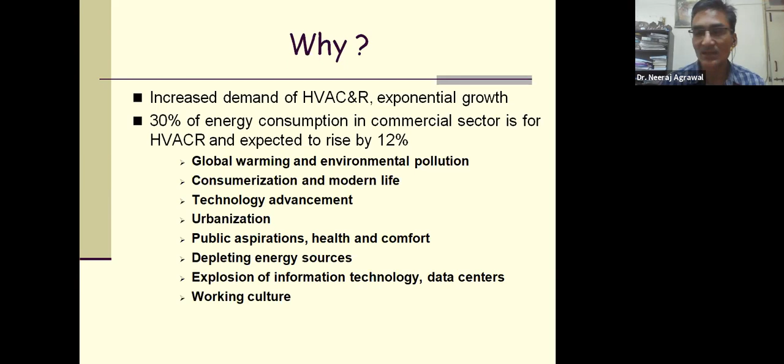The explosion of information technology and data centers, as I said, because air conditioned data centers are altogether an area which is coming up. And of course, the working culture as well.

Conventional cooling technology, the vapor compression system, is considered to be the workhorse. Still, the maximum cooling share is by the vapor compression system, not only in India but globally. So what is the problem with vapor compression refrigeration and air conditioning systems?

It is completely an electrical driven process, though some technology advancements are taking place. But by and large, it is a system that is completely electrical driven. As I mentioned, the maximum share is still huge.

As of 2005 in the US, 99.9% of systems were running on this vapor compression system. The first cost is low, and it is good because it is convenient and safe to use.

But of course it's energy intensive. One reason, as you know, from the 1980s it was discovered that the use of CFCs in vapor compression systems, where refrigerants like CFC, HCFC, and HFCs are commonly used, causes destruction of the ozone layer and global climate change.

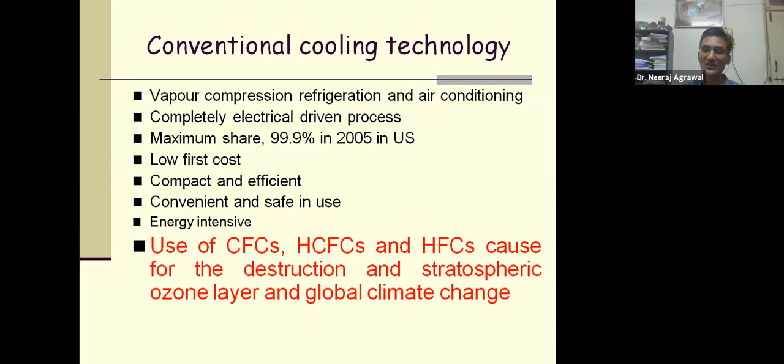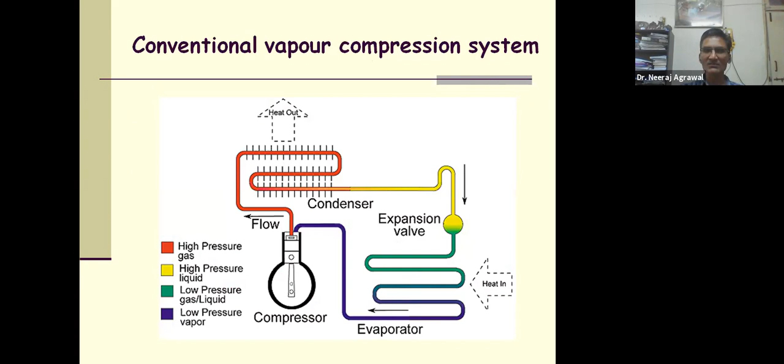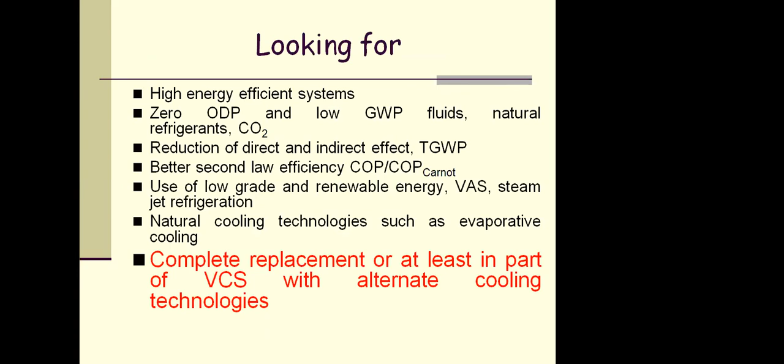So now, since the vapor compression system is used in maximum cases, but because they are an energy intensive process consuming a lot of direct electrical energy, and there's also the problem with the refrigerant, we are looking for a high energy efficient system.

One target, of course, can be achieved with the vapor compression system also, I'm not denying that. But we have to look for high energy efficient systems with zero ODP and low GWP fluids, and systems that can run on natural refrigerants, because CFCs, HFCs, or HCFCs are all harmful for the ozone layer.

Reduction of direct and indirect effect - this is what we call total global warming potential. That means one has to reduce or limit refrigerant use if it gets directly leaked, which is why we need to find a natural refrigerant.

Indirectly this means one has to reduce the energy consumption, because if energy consumption is less, then automatically the greenhouse gas emission will be less. We also need better second law efficiency, because one cannot rely only on the first law efficiency.

If you compare the vapor absorption system with the vapor compression system, we say the COP for vapor compression may be 3 or 4, but that COP is only the first law COP. In the vapor absorption system, though its COP is less than 1, it is a true COP, whereas the first law COP is not a true COP. So we have to look to the second law efficiency.

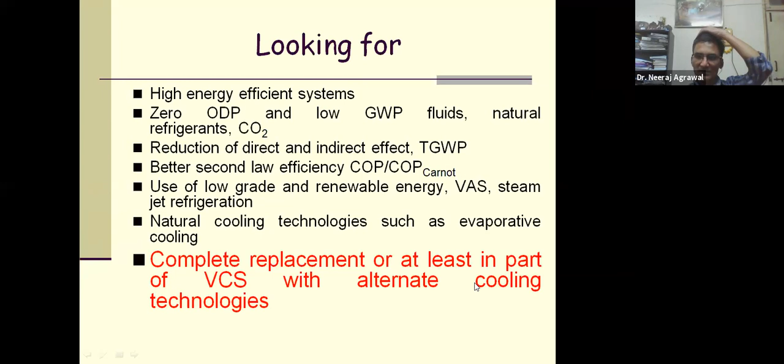Use of low grade and renewable energy, like vapor absorption systems, steam jet refrigeration, and natural cooling technology such as evaporative cooling, can enable complete replacement of the vapor compression system with alternate cooling technology.

Now if you look at these, these are some of the technologies enlisted here. Electrical: thermionic cooling, electrocaloric cooling. Mechanical vapor compression system: subcritical and transcritical. Where there is no phase change: air cooling, pulse tube, ejector, vortex tube, reverse Stirling - different technologies are there. Acoustic: thermoacoustic refrigeration, magnetic refrigeration. Chemical: latent heat, potential, thermal, and natural cooling is also there. So these are the different cooling technologies.

If you look here, the maximum share is still with vapor compression, and within vapor compression the maximum focus was on subcritical. The rest of the technologies are not in very much use. Electrical thermoelectric cooling is there, but it's still not used at the commercial level. Magnetic cooling is still not at all in use at the commercial level. So we have to look at some alternate technologies.

So here I will try to touch upon some of the alternate technologies, like evaporative cooling, vortex tubes, use of natural refrigerants, and indirect-direct evaporative cooling. That is what we will see in the subsequent slides.

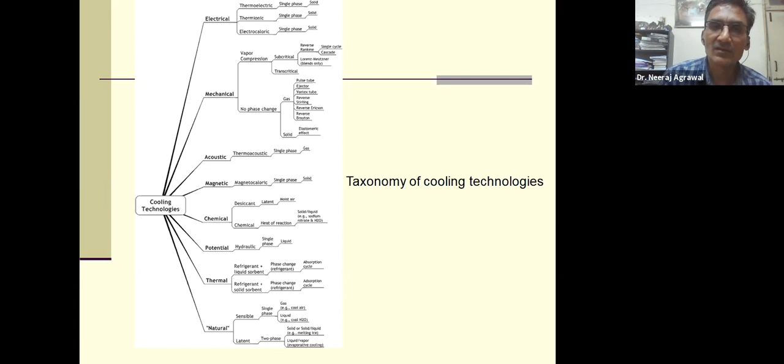So the alternate cooling technologies which I'm going to cover: evaporative cooling, which is basically an age-old technology, used in all ancient buildings, used to cool the building. Two-stage indirect-direct evaporative cooling, which is an improved version of evaporative cooling. Then hybrid desiccant cooling, where two different technologies are hybridized. And then natural refrigerant with transcritical CO2 cooling technology.

As I said, refrigerants are the culprit, so we have to look for sustainable technology. One way is to use natural refrigerants, and of course vortex tubes are also a wonderful system. These are some of the alternate cooling technologies where, in a sense, there is no refrigerant or chemical used which can harm the environment, and at the same time the energy consumption is also relatively less. So both the problems I just narrated can be solved.

But of course, when we talk about evaporative cooling, performance-wise or output-wise, it is not as effective as a vapor compression system, but they are very close. So with some sacrifice, one can go with the technique of evaporative cooling.

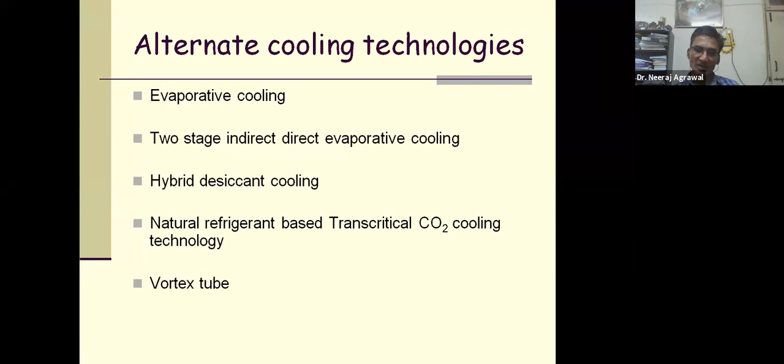Evaporative cooling, as I mentioned, is an ancient technique, effectively used in almost all ancient buildings across the globe, not only in India but across the globe. That's why all our ancient buildings are surrounded by water bodies. Why? Because when water flows around the buildings, evaporation takes place, so cold air flows across the building, and one can have a cooling effect.

So this evaporative cooling is very common, one of the very common technologies in northern India. In Ahmedabad, I still remember, is a place where evaporative coolers are being manufactured at industrial level, and used at the industrial level. In many places now, even the ducting is also there.

Once I visited Bajaj Auto in Pune, and they are using evaporative cooling very intensively for providing cooling to the workers.

Due to this, their productivity has increased. So one can understand how it is effective—simple, inexpensive, and an attractive solution for conventional cooling systems. This is being used in many places, and evaporative cooling can also be used as a subsystem for a vapor compression system.

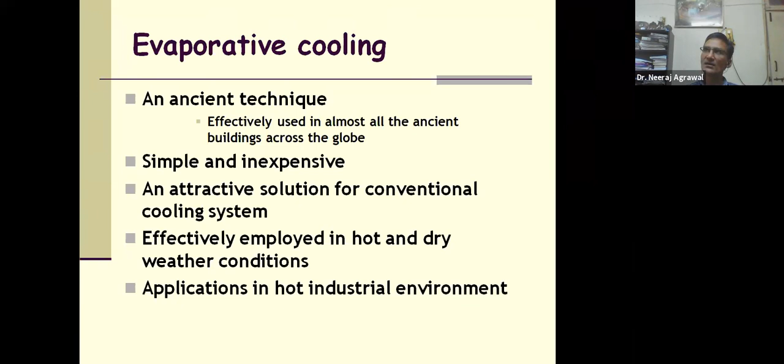So theory of evaporative cooling—on what basis does it work? Of course, the whole principle of evaporative cooling is based on adiabatic saturation. Adiabatic saturation means the air flows over the water, and air gets saturated, so the water gets evaporated and moisture is being transferred.

So in that whole process, this is the transfer—basically air surrenders its sensible heat to the water for evaporation, and then this heat is transferred into the air in the form of latent heat. So when air surrenders its sensible heat, it means its temperature drops, but at the same time it takes back heat in the form of latent heat.

That means the moisture content increases. So this way, the temperature of the air decreases, but at the same time at the cost of its humidity. That is the reason. So this whole process takes place adiabatically, that's why we can say it is adiabatic saturation.

That process can continue till the air gets saturated, that's why we say adiabatic saturation. So here, one of the technical terms is WBT, or wet bulb temperature, of the ambient or surrounding air, which plays a very important role, because in evaporative cooling, the air cannot be cooled lower than the wet bulb temperature.

The kind of process which takes place, we call cooling and humidification. As I mentioned, there is a combined heat and mass transfer—simultaneously, air surrenders sensible heat and evaporation takes place. So that's why doing experimentation on evaporative cooling is relatively easy, but doing theoretical work is really challenging, because both heat and mass transfer are involved.

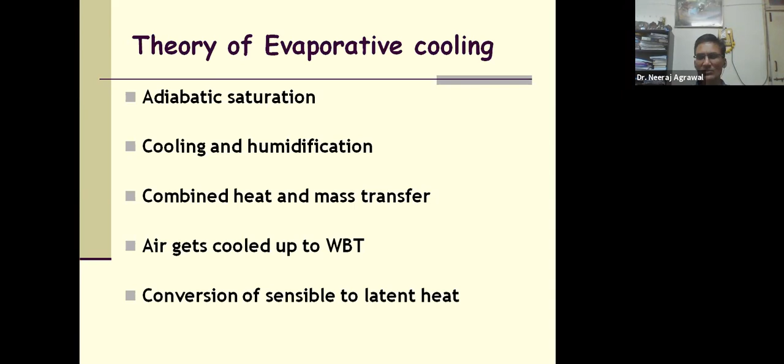Air gets cooled up to WBT, that's why, as I said, this is a limitation—conversion of sensible to latent heat, as I explained.

So this is a very typical simple diagram of evaporative cooling. As hot air goes through, this is the pad where water falls. So if you look here, the performance of evaporative cooling very much depends on the pad quality, density of the pad, and basically its retention capacity of the water—how the structure is—that plays a very important role in evaporative cooling.

So look here, this is the wet bulb temperature. Across the wet bulb temperature, you see the temperature has dropped from this point to this substantial temperature drop. The maximum it can be dropped to is here, as you know, this is the wet bulb temperature of the air. So this is the psychrometric representation.

Then practically, it can be cooled to this point, then it is supplied inside the room. So one can see here, as the air gets cooled, its temperature drops, but humidity increases, and then the air is supplied inside the room. When it is supplied inside the room, it picks up heat, so its temperature increases, and also there is some addition of moisture by the occupants, so humidity also slightly increases.

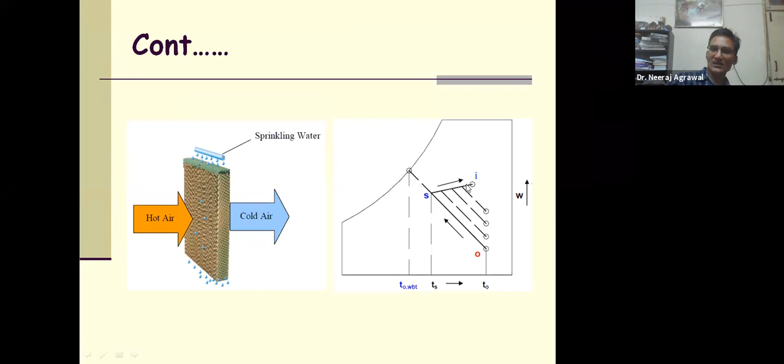So I have done some experiments on that. In the subsequent slide, I will show you something. In one of my projects on evaporative cooling, I took two different kinds of pad material, Aspen and cellulose.

We have taken some modification in the design. Look over here, the energy consumption is just 18 watts. It is one pump and a fan, not more than half a kilowatt or even less than that. So look over here the kind of energy input.

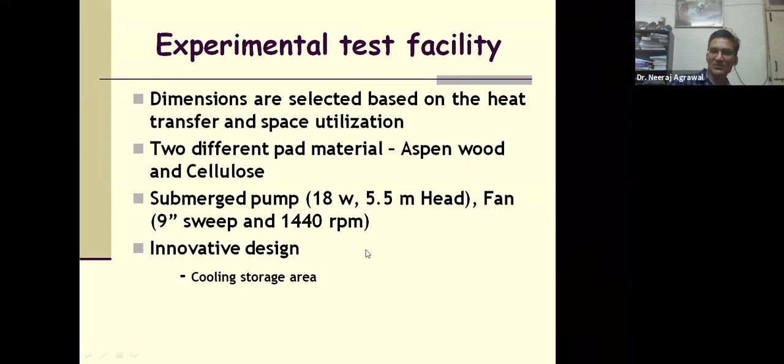So look over here, there are two different kinds, cellulose and Aspen wood. These are the two kinds of pads. And this is the one design which I have used over here. Look over here, these are all three sides, there are pads over here. This is the conventional motor.

But here at the top, one box is created, and that water, which is at quite low temperature up to the temperature of WBT, is pumped. This water is designed in such a way that the rate at which it goes down and falls over the pad, and the rate at which it is pumped - the rate at which it goes down is less.

So always a water level is maintained here, and that water at the temperature of the WBT of incoming air, or slightly higher than the WBT, can be used to keep the commodity cool, like vegetables or other things in the summer. So that is the basic concept of this design.

So this is basically a simple water pump, and this is the conditioned space. This is how the supply air passes through the media pad. This is the experimental test facility.

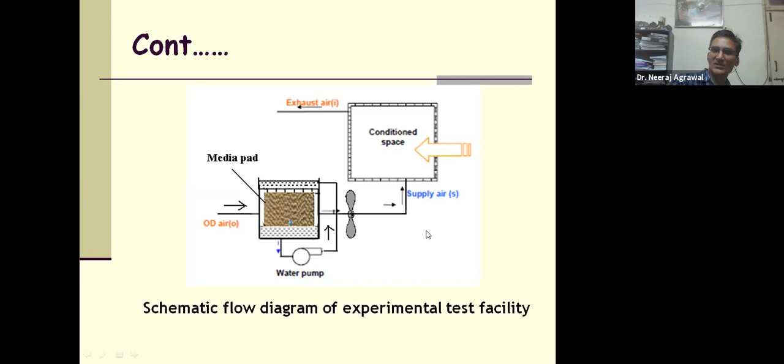The tests were conducted with the two media pads I mentioned, Aspen wood and cellulose, varying the flow rate to optimize the incline of the slot. What is that incline of slot?

Let me explain. Look over here, the slots are there, and here is the fan. Air is being sucked from here, from the bottom side. Look over here, at the initial beginning itself there is maximum contact of air and water. So the maximum heat transfer, or maximum evaporation, takes place at the point where the air is sucked.

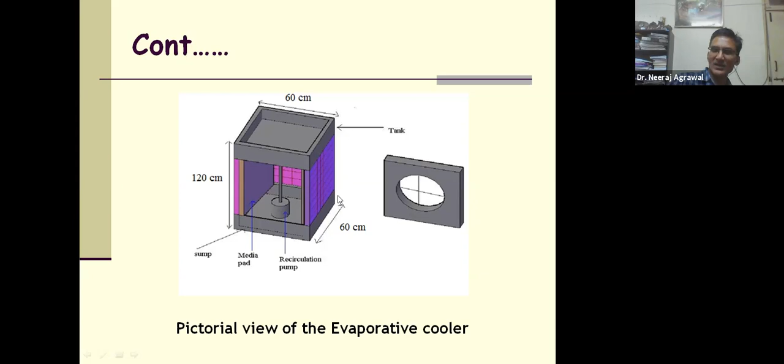Now what happened, the thought was: if I make a slot which is inclined, when the water falls on that, the maximum water gets accumulated at that point. So that means when there is more water there, the performance may increase. So that is the concept used - the incline of the slot.

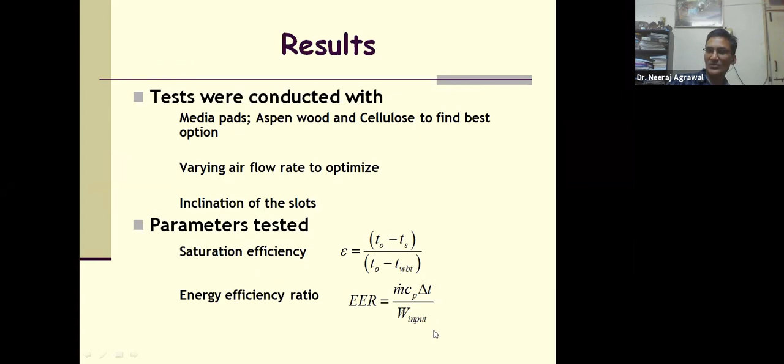There are two parameters: saturation efficiency, which is T0 minus Ts, actual divided by T0 minus Twbt - this is the practical temperature drop over the maximum possible - and energy efficiency ratio, based on the mass flow rate of air, temperature drop, and the work input in the form of the pump and such.

If the air flow rate is lower than a certain optimum flow rate, why is the saturation efficiency low? Because the air flow rate is so low that by the time the air picks up the heat, the water is not sufficient enough, so there is no proper evaporation taking place.

But at the same time, we have to match it such that the rate at which the water falls and the rate at which air reaches complement each other. Now, if the air flow rate is very high, the air doesn't get time to come in proper contact with the water, so proper evaporation cannot take place.

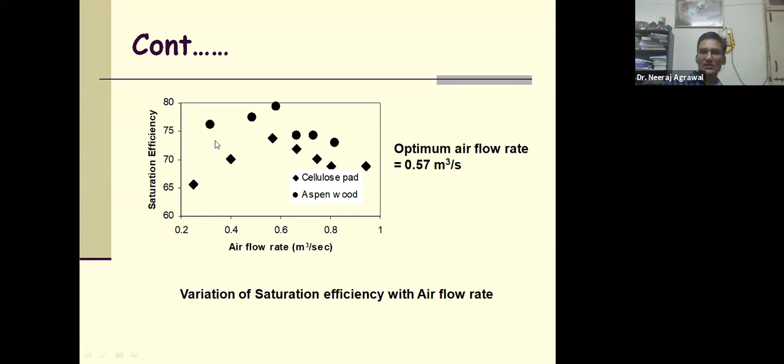In the previous graph, aspen wood gives better saturation efficiency, but the pressure drop is more, which means it consumes more power. So one has to look at totality - due to high saturation efficiency, aspen wood may be good in terms of performance with respect to drop in temperature in a given time, but it consumes more power, and there is a substantial difference. So from this point of view, the cellulose pad is better.

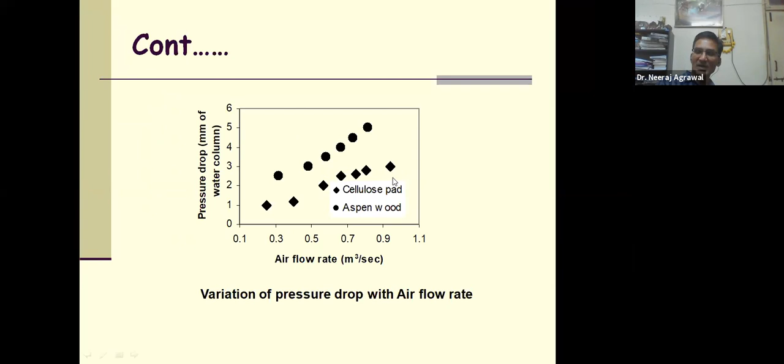One has to look at other aspects also, like saturation efficiency and wet bulb depression. Wet bulb depression plays a very important role - as it increases, since there is a difference between dry bulb temperature and wet bulb temperature, as dry bulb temperature increases, things become drier, so the performance will be better. But in this case also, aspen wood performs better.

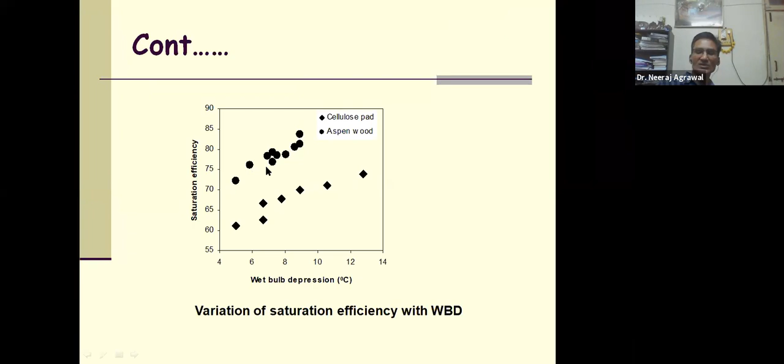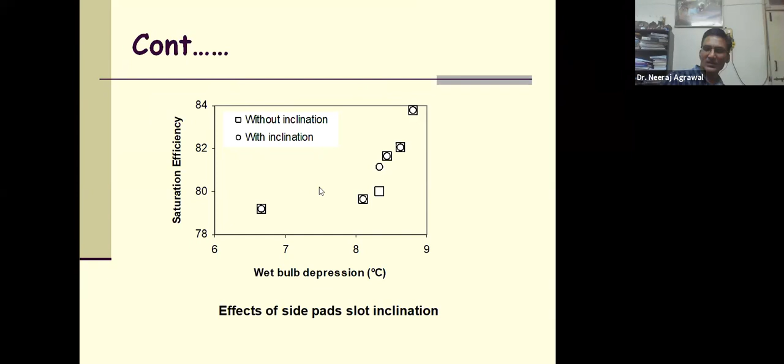I also tried some kind of inclination in the slot, so that more water can accumulate towards the end of the evaporative cooler, from where the air gets entered. But perhaps we could not record that properly, so there is not much data on the wet bulb depression here.

Now look overall at cellulose pad and aspen wood. With the cellulose pad, the optimum flow rate is almost the same - there is some difference, in aspen wood it is 0.58 and cellulose pad is 0.57. But the pressure drop, if you look here, cellulose pad pressure drop is 2 mm and in aspen wood it is 3.4, so with aspen wood the pressure drop is basically more.

Power consumption - look at the difference here, it is pretty high, 90.32. Saturation efficiency, of course aspen wood is higher, 79. Durability - once you buy the cellulose pad it can run for 2 to 6 years, but aspen wood lasts only 5 months. And energy efficiency ratio is something like 47.75 for one and 44.88 for the other. So though the saturation efficiency of aspen wood is higher, in totality the cellulose pad is better.

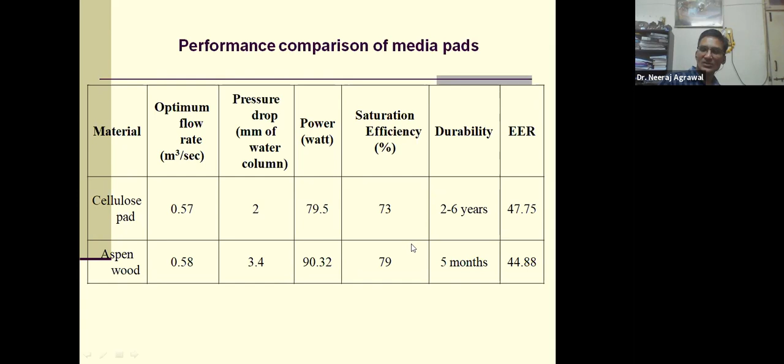That's why down the line till 2005 or 2010, people were using aspen wood, but nowadays the entire evaporative cooling industry uses the cellulose pad only. It is very good - there is no sagging problem. So this is basically the conclusion.

Now, of course, when we go with the kind of evaporative cooling we discussed, this is a direct evaporative cooler. So there is some limitation of direct evaporative cooling - it is ineffective in humid and temperate conditions, that means not much effective when dry bulb temperature is less than 40 degrees and wet bulb temperature is greater than 23 degrees.

Of course, in evaporative cooling, it is a well known fact that because high speed is required, there is noise and vibrations. Since there is no control of humidity, and due to the flow of air, a lot of draft is formed within the room. That means there is not uniform cooling. One part where the air reaches is pretty cool, and other parts there is no cooling.

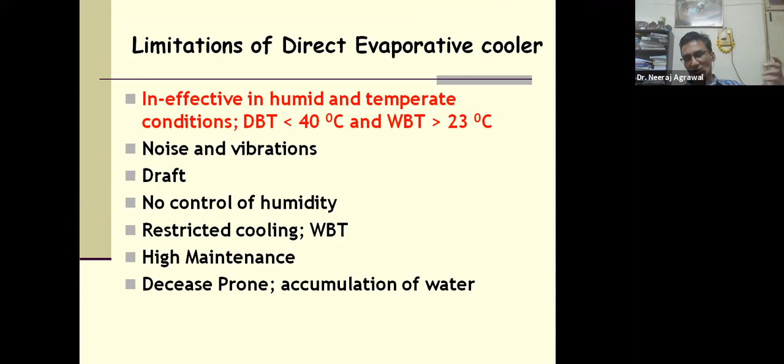So people always try to sit in front of the evaporative cooler, and some kind of fight happens over it, but in case of air conditioning, the entire room gets air conditioned. There is no control of humidity, restricted cooling only up to WBT, high maintenance, and disease prone, because water continuously remains, causing accumulation of water.

But of course, the humidity increases. So now what is the solution? If we can have some solution where with indirect evaporative cooling, one can have a temperature drop, but the rise in humidity is not as high as in direct evaporative cooling.

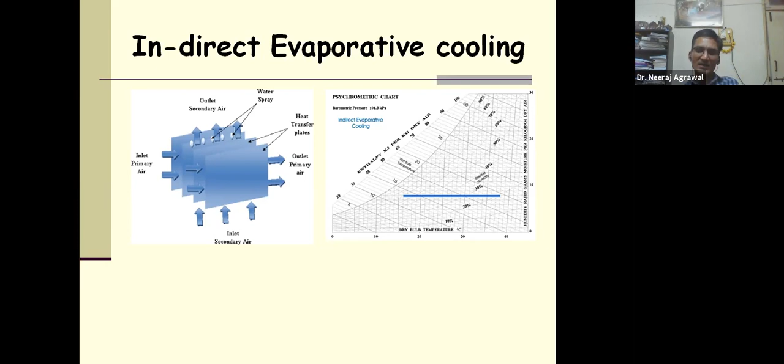So look over here, this is a two-stage evaporative cooling. One is the indirect, where the warm air gets cooled not in direct contact with the water, rather through surfaces cooled using the direct evaporative cooling technique with secondary air flow. So at one side, direct evaporative cooling takes place, cooling the surfaces, and these surfaces form a channel through which the warm air flows, getting cooled, and then it goes to direct evaporative cooling.

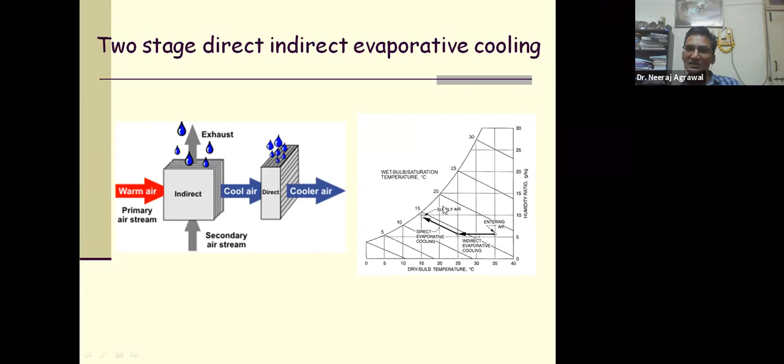So one can see there is no change in humidity, but there is a drop in temperature, and then there is the direct stage. Always remember, it cannot be direct and indirect, it is always indirect and then direct. If I go directly from here to achieve the same temperature drop, the humidity would be pretty high compared to this method.

So here, sensible cooling is followed by adiabatic saturation, effective in all weather conditions, because even in high humidity conditions one can achieve better humidity control, better cooling, energy efficiency, and less latent load. This is the reason.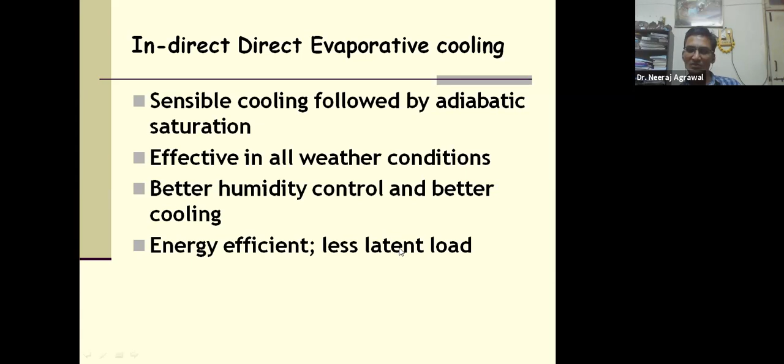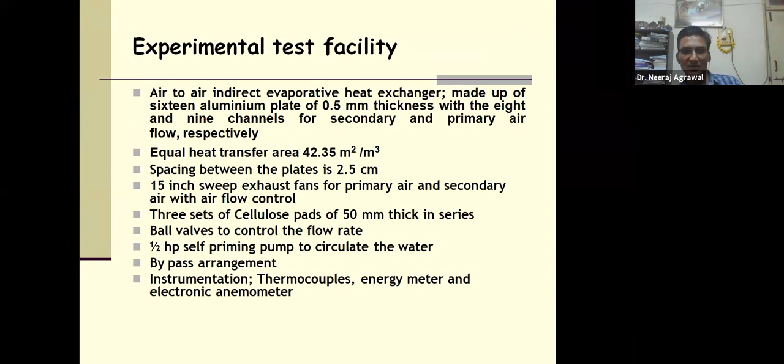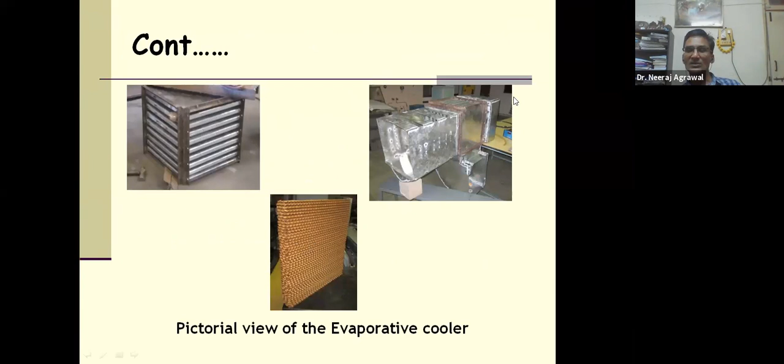Now if you look over here, this is the experimental setup, where again I have done some experimentation. Basically you can see the different specifications. As I was mentioning, with the channel, air flows through it. So this is the fabrication we have done. This is a pad, and a duct was formed, primary and secondary. This is the overall picture.

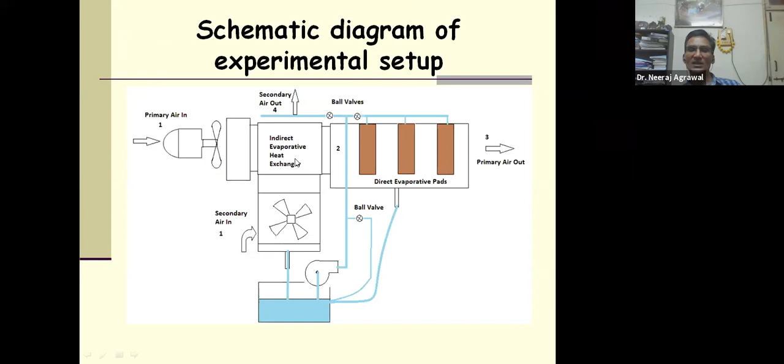So look over here, this is the indirect evaporative cooling. Secondary air goes here, gets cooled, and flows in the channel. Primary air flows over here, through the channel, and then the direct stage happens. So in this way the air gets cooled. This is the system, first indirect, then direct, and then it goes further.

So the operating parameters are water flow rate, primary flow rate, secondary flow rate, heat transfer, pad material, and ambient conditions, which will vary. Look over here, this is the water flow rate for two different fluids: 12 liters per minute and 8 liters per minute, showing secondary air outlet temperature. Looking at the secondary air velocity, for both cases there is one point at which the secondary outlet temperature is minimum.

So this is again, one has to maintain this particular air velocity so that the channel gets cooled more and more. So this is the conclusion.

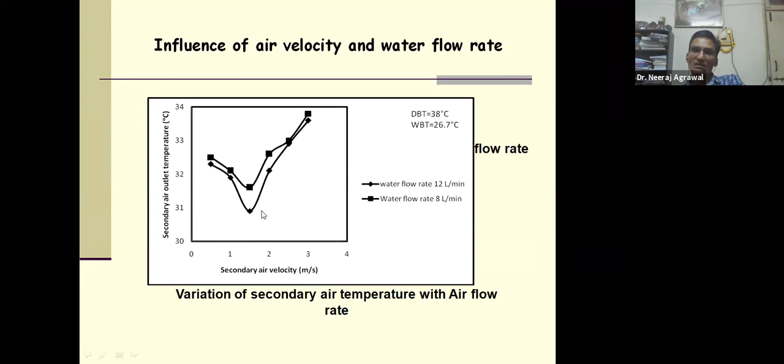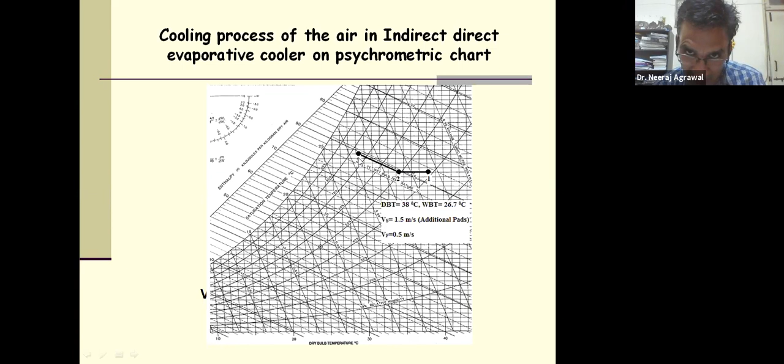Now look over here, this is the psychrometric representation. So how we got the temperature drop: the air supply temperature was somewhere 38 degrees Celsius. Then in indirect evaporative cooling it was cooled to somewhere 33, and then in direct evaporative cooling it was cooled to 30, from 29 degrees Celsius.

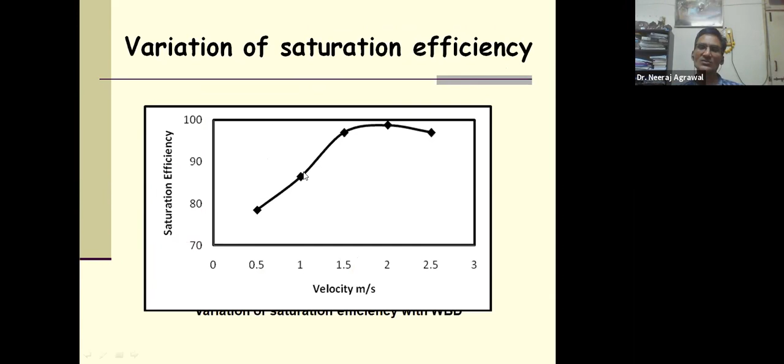So this is the variation of saturation efficiency. Velocity increases saturation efficiency, but beyond that it was arrested.

Then there is another concept which we call hybrid desiccant cooling. Hybrid desiccant cooling means a combination of vapor compression system and desiccant. This system is used in high humidity conditions, high latent load, where the sensible heat factor is pretty low due to high latent load. For high latent load, one has to reduce the ADP of the coil, and once the ADP is reduced, there is unnecessarily a penalty on the vapor compression system. So the solution is to go with hybrid desiccant cooling.

Conventional process cooling and dehumidification needs low ADP, which causes energy inefficiency, because it's a hybrid of two systems: desiccant wheel followed by vapor compression system. Latent load removal is done by the desiccant wheel, so there is no need to drop the temperature of the cooling coil. Removal of sensible load is done by the vapor compression system DX coil.

The wheel needs to be regenerated after each cycle, because the wheel absorbs moisture and needs to be made ready for the next cycle. It has to be heated, so sensible energy is consumed. Air gets heated after removal of latent load and needs to be cooled before passing the DX coil. Cooling can be done by employing indirect evaporative cooling, nocturnal cooling, or mixing of recirculated air.

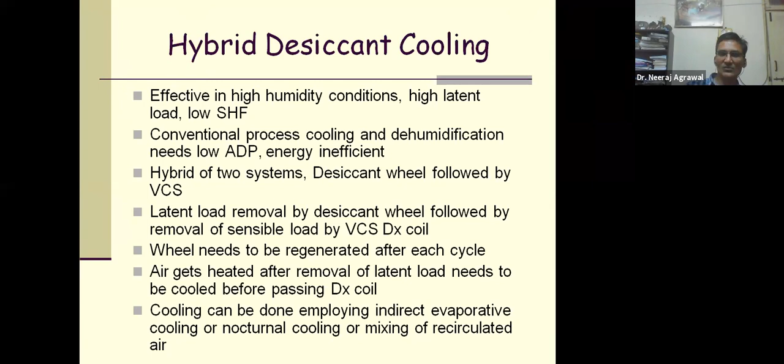So this is the phenomena which I have used over here, the hybrid process. This is the regeneration heat source, and this is the desiccant wheel, so moisture is taken out and all the latent load is removed. So air becomes dry, but not only dry, it gets heated up.

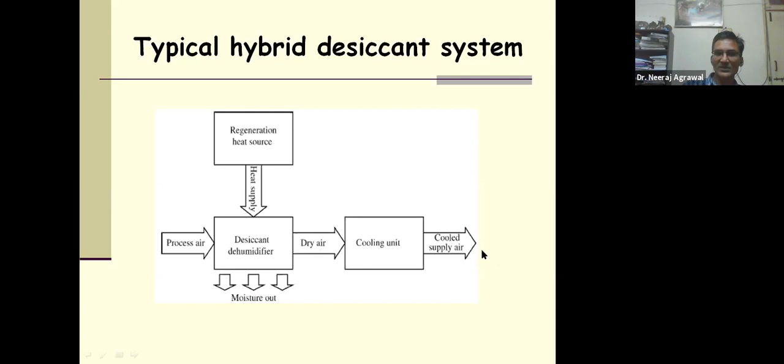So by this, air is to be cooled and then supplied to the conditioned space. Nocturnal cooling means the water temperature can be dropped at night, and that water can be used for cooling purposes in the hybrid system after dehumidification. In this way we are using natural cooling in the hybrid system. Heat dissipation is carried by long wave radiation from a building to the sky, which is called radiative cooling or nocturnal cooling.

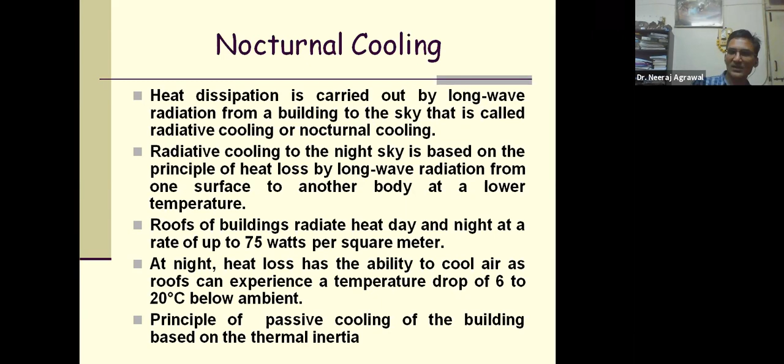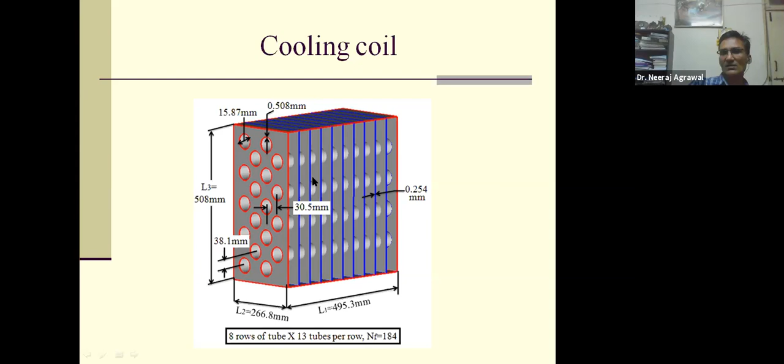Hello. Yes sir, audible sir, yes. Just a moment, my slide is not moving. I don't know what happened.

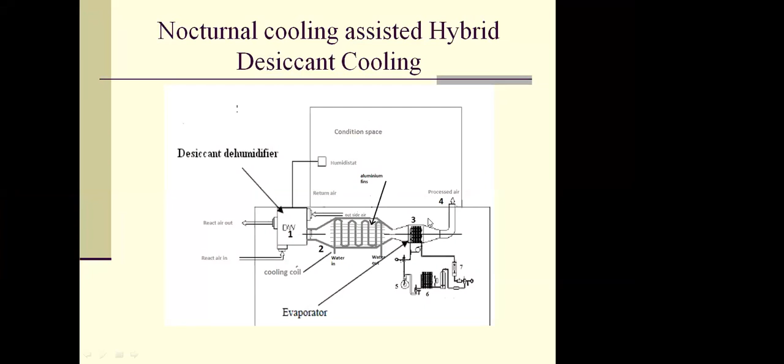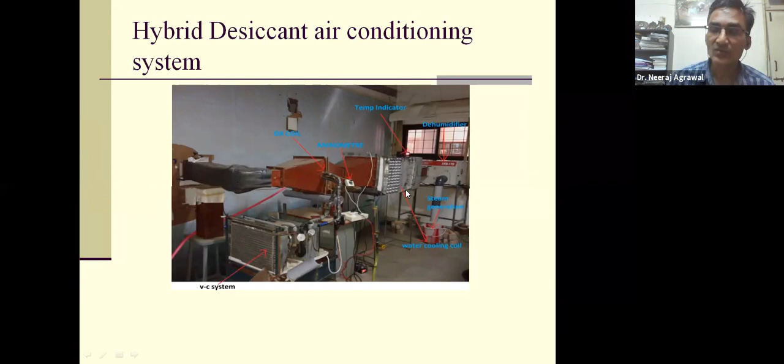So this is the system you can see over here, this is the dry air dehumidifier, and this is steam generation just to add additional moisture which we have done over here. Then it goes to the dehumidifier, the temperature indicator, and this is the cooling coil, where water is used which is nocturnally cooled, and then it goes over here. Then this is your conventional vapor compression system, this is the condenser, and here the DX coil, and then air goes inside. So this system we have developed inside our lab.

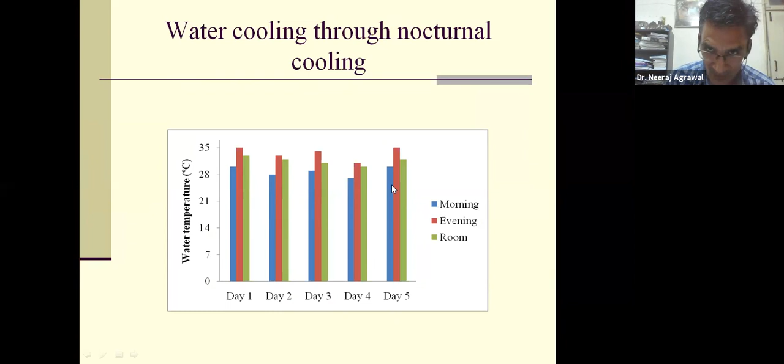Now look over here how the water cools through nocturnal cooling. In the morning, you can see the temperature has dropped. In the evening the temperature is this much, but in the morning you can see the temperature drop. So that is what we recorded for day 1, day 2, day 3, and that water is used for the cooling coil.

Look at the typical result: outside air, when it passes the dehumidifier, its humidity is decreased, but the temperature reaches somewhere around 46 or 49. Then it was cooled in the sensible cooling, that is in the cooling coil, using the nocturnal cooled water. Then it enters the conventional vapor compression system, where it is cooled, dehumidified, and then supplied into the room. So that is the typical process.

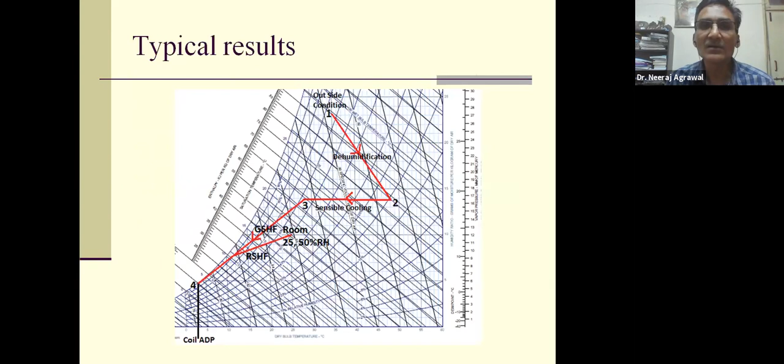So that is what we have discussed so far regarding evaporative cooling.

Now let's have some idea about natural refrigerants. Carbon dioxide is one of the natural refrigerants, and it is absolutely harmless - no ozone depletion, no global warming potential, and it is safe. So this is one of the upcoming natural refrigerants.

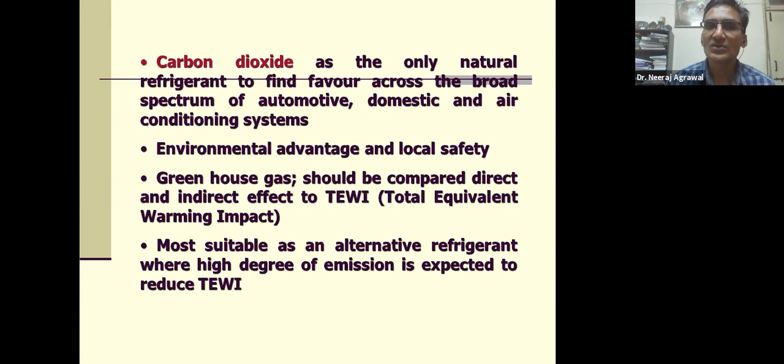But because carbon dioxide has altogether different properties or characteristics, the system is not like a conventional vapor compression system. Look over here, half the cycle is above the critical point and half is below the critical point - this is the critical temperature. That's why we call it transcritical.

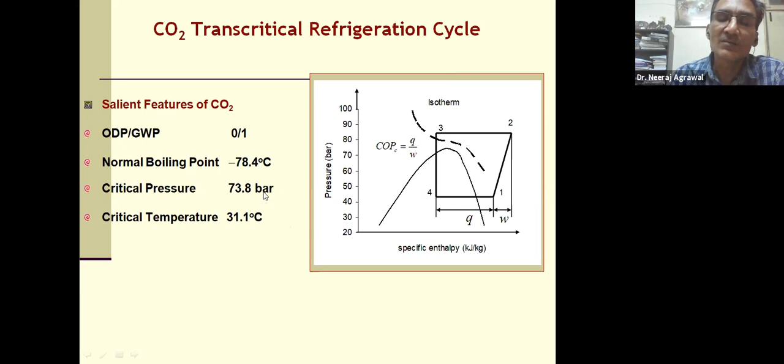What is the reason for this? The critical temperature of CO2 is 31.1 degrees. Almost all conventional refrigerants have critical temperatures in the range of 70, 80, 90, 100, even more than 100. But for CO2 it is much lower, and the corresponding critical pressure is 73. So it needs to be operated above critical. Once it is above critical, pressure automatically increases. That's why the CO2 system is known as the transcritical system, with pretty high pressure. The operating pressure in the majority of CO2 systems is above 90.

So here is a comparison of different refrigerants, let's say R12 or R134, very common. Look at the critical temperature - for these it's 101.1, but for CO2 it is 31.2. One of the greatest advantages of CO2 is the volumetric refrigerant capacity - see how much difference. R134A is 2860, but CO2 is 22545. That means for a given cooling capacity, the CO2 system is very compact.

That's why one of the great advantages of the CO2 refrigeration system is in car air conditioning. In European countries, it is very well in use. Another advantage: it is not very energy efficient when used for refrigeration, but when used for heating purposes, particularly in heat pumps, it is quite useful.

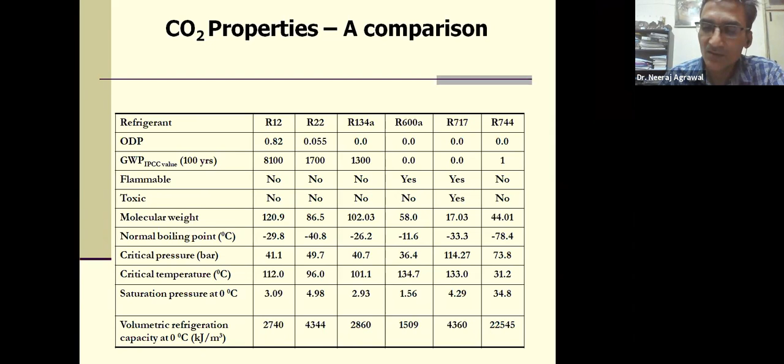What are the merits? As I mentioned - natural refrigerant, high volumetric cooling capacity, absolutely harmless, low pressure ratio. If you look here, in absolute terms the pressure is high at the gas cooler side, and at the evaporator also the pressure is high. So though in absolute terms pressure is high, the ratio is less, because in a conventional system the pressure ratio may be as high as 12, but in this case it's hardly 2 or 3. It's also non-flammable and non-toxic, so there's no problem - unlike ammonia which is very toxic, or SO2 which is very toxic. But CO2 poses no such problem.

Temperature glide is another advantage, because in the gas cooler the temperature does not remain constant - everything is above the critical point, so it remains in gaseous phase with no phase change. Excellent heat transfer properties is another advantage, along with a compact system. Another advantage of CO2 is that because its operation is transcritical, pressure and temperature are independently controlled, so one can achieve a better COP.

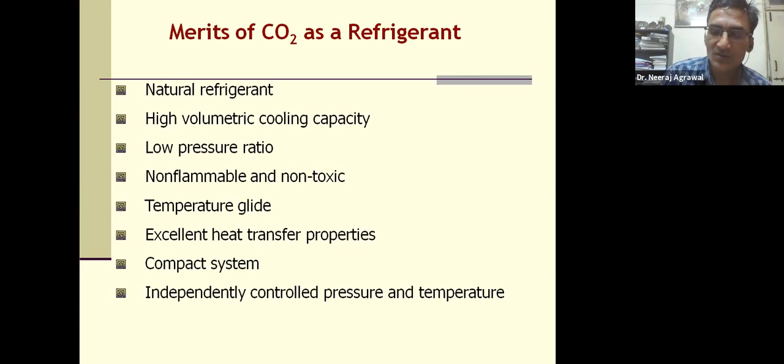Salient features of CO2: low critical temperature, high pressure difference - three times larger, as I mentioned. I'm talking about the pressure difference, not the ratio.

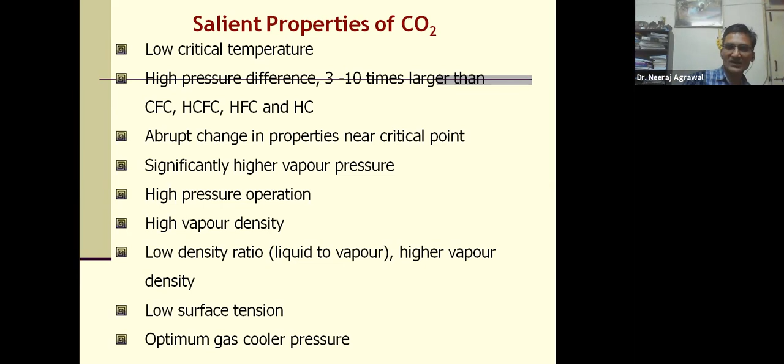Abrupt change in property near critical point. This is what one needs to consider when designing anything for CO2. High pressure operation is significant, with higher vapor pressure and high vapor density, which is useful while designing the expansion device for CO2. Low density ratio is also an important factor, along with low surface tension and optimum gas cooler pressure.

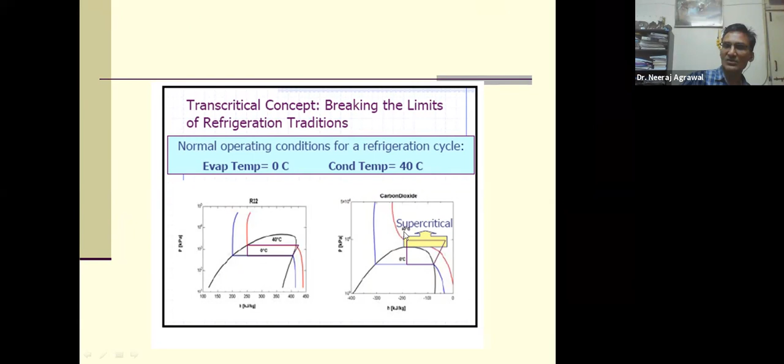Look over here, this is a typical diagram. This is a conventional system, and this is your supercritical system. This is typical for evaporator temperature, zero in both cases, but look at the pressure. This diagram explains the basically optimum pressure.

I will not go into much detail. Optimum pressure means for a given temperature line, one has to operate at one particular pressure. If you look at this line, there is one COP. If you increase the pressure from this to this, the gain in refrigeration is here, but work done increases less. So for a given temperature, if you operate at this pressure, the COP will be low, but if you operate at this pressure, the COP will be high.

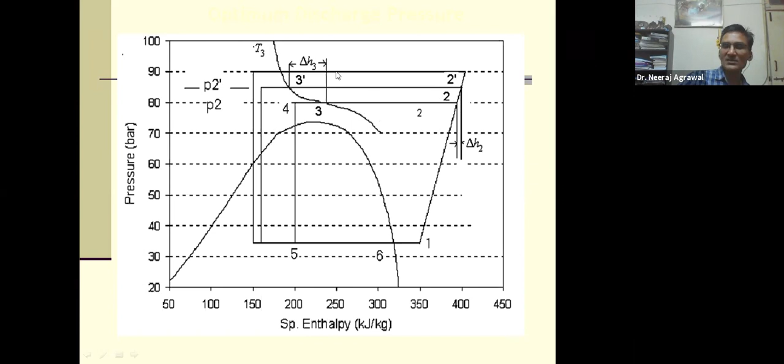This is against the conventional vapor compression system. In a conventional vapor compression system, as the condenser pressure increases, COP always goes down, but here it is different. If you further increase the pressure, then the COP further decreases. So there is an optimum pressure, and one has to operate at that optimum pressure.

Applications include automobile air conditioning as one sector. Simultaneous heating and cooling can be used for dairy applications. In Scandinavian countries like Norway, CO2 is very well in use for all heating purposes, water heating, and residential heat pumps. Now people are becoming more health conscious and comfort oriented, so in many cities, heat pumps are being installed in many residential areas. CO2 can be a very good option for heat pump applications.

Air heating system is not yet established. Other applications include heat pump dryers and process plant applications. So these are some of the applications.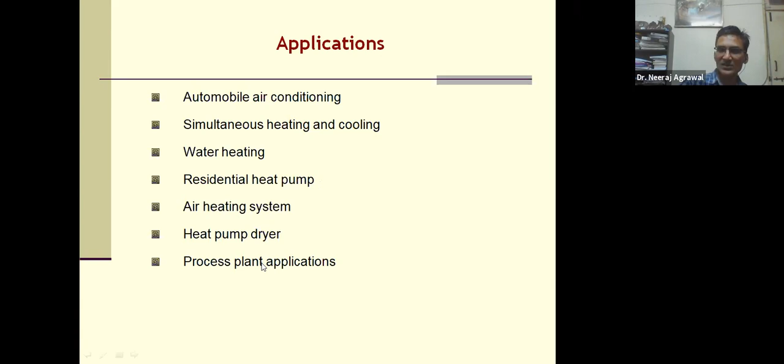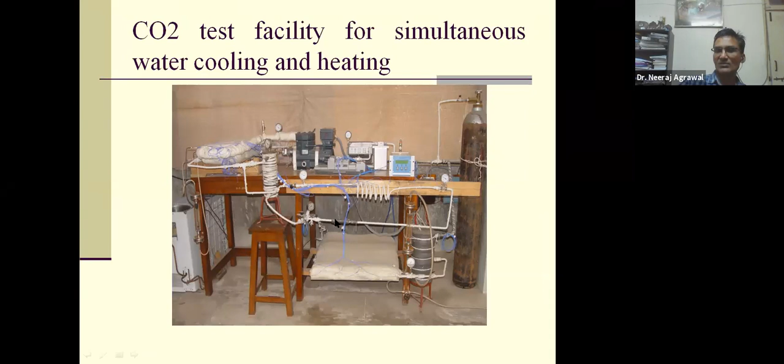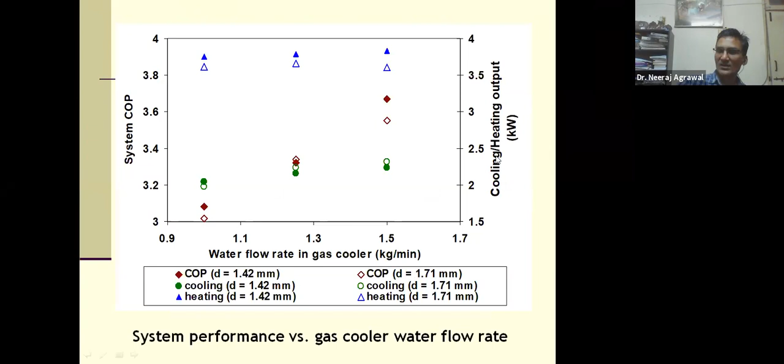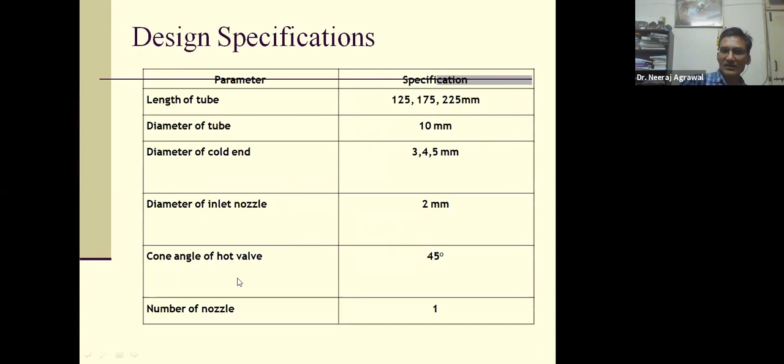We have done some experimentation, taking tubes of different length and diameter of the cold end. If you look over here, this is called the cold end, this is called the hot end. We also varied the diameter of the inlet nozzle and cone angle. The cone angle is the angle through which this cone strikes the air. And we used one nozzle.

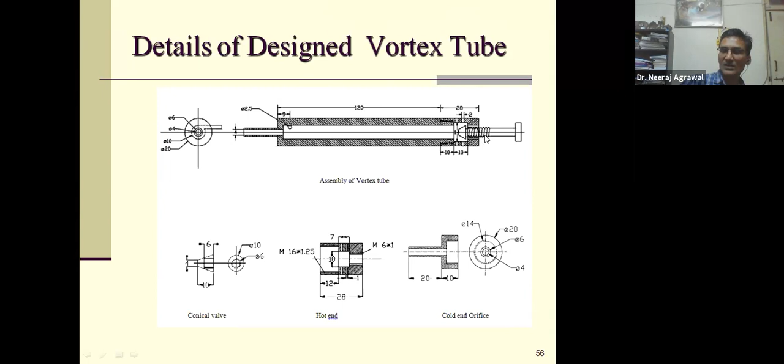This is typical of what we fabricated and developed for the nozzle. This is the vortex at this end, this is the cold end, this is the hot end. You can see the conical screw, and with opening and closing, the control of the air flow was achieved over here. You can see this typical diagram, this is a typical experimental setup.

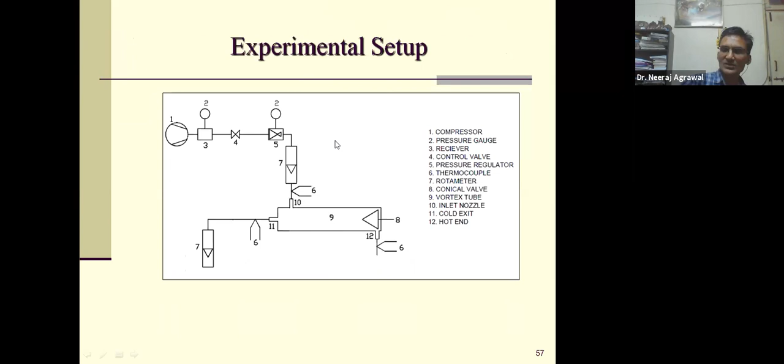This is the vortex tube, you can look at how we tested 3 different L by D ratios. So the L by D ratio plays an important role over here.

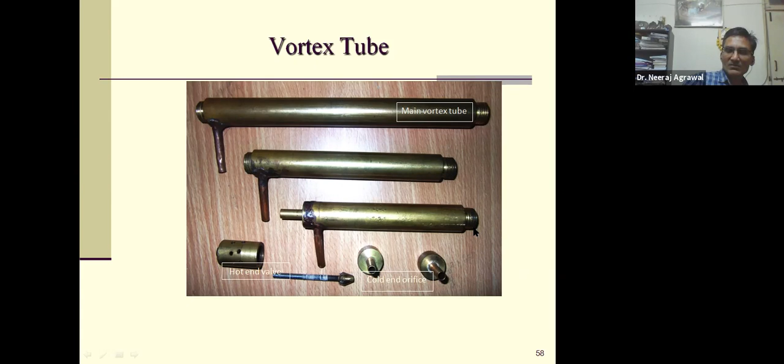This is two rotameters and the whole setup. We have also done some experiments with CO2, the CO2 cylinder. This is an FRL unit.

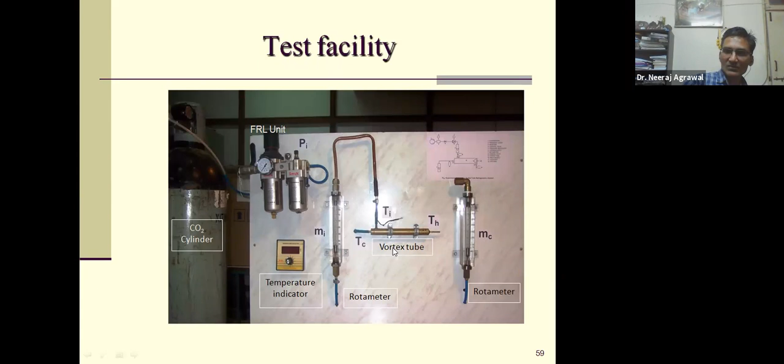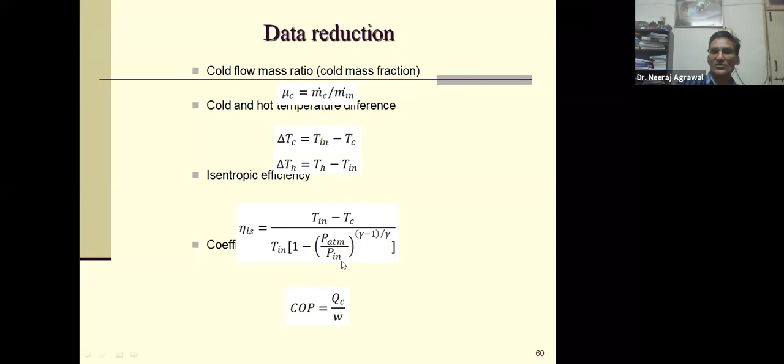So look over here, these are the operating parameters through which cold mass ratio is very important, which is the mass of cold air, the rate of cold air divided by the total amount of air in. Cold and hot temperature difference, and this is the isentropic efficiency. So these are the parameters.

Look over here, the percentage of cold mass fraction means how much percentage of the total air comes out from the cold end. We have done one study, and look over here, this is the cold temperature difference. More temperature difference means more cold air, the cold air temperature will be less.

So look over here, in all three cases of L/D ratio, there is one flow rate at which we were getting the maximum effect. We got a temperature difference of the order of about 29 degrees. That means if the air temperature is 49 degrees, it dropped to even 21 degrees or so. This is basically at 60% cold mass fraction, as I mentioned.

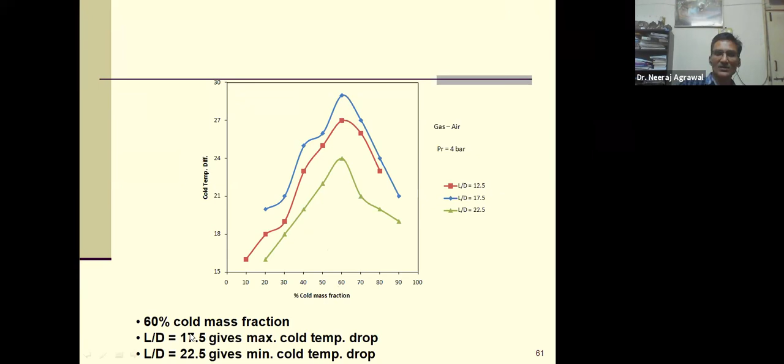L/D of 17.5 gives the maximum cold temperature drop. So this is the study that was done, which I wanted to share with you. I have tried to give you some idea about that.

Basically, evaporative cooling, then indirect and direct evaporative cooling, some idea about the CO2 system and the vortex tube - all these four different kinds of systems are very non-conventional and non-traditional. Like in the CO2 system, CO2 is a natural refrigerant. Evaporative cooling uses no refrigerant, and the vortex tube also uses no refrigerant.

So this is what I wanted to share with you. If you have any specific questions, one can ask.

Thank you, sir. Any question from the participant side? Am I audible? Yes, sir, any question? I have tried to finish on time.